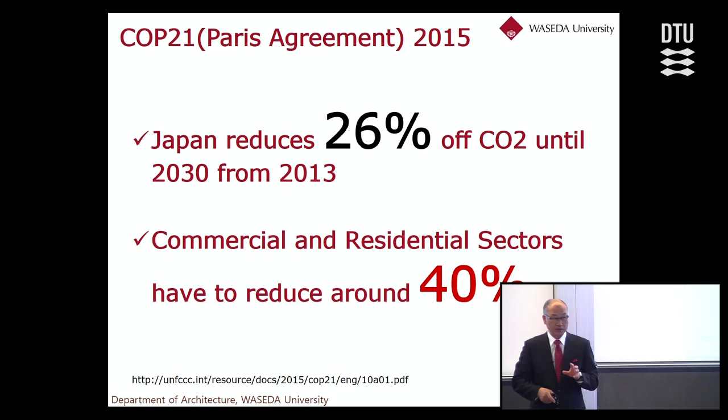Probably everybody knows the Paris Agreement, COP21. Maybe the US has a problem, I don't know. But we promised a 26% CO2 reduction in Japan, which is actually very hard. This time the government asked that the commercial and residential sector should reduce 40%. Industry is very efficient now, so it's very difficult to reduce further there, so they promised only 7%.

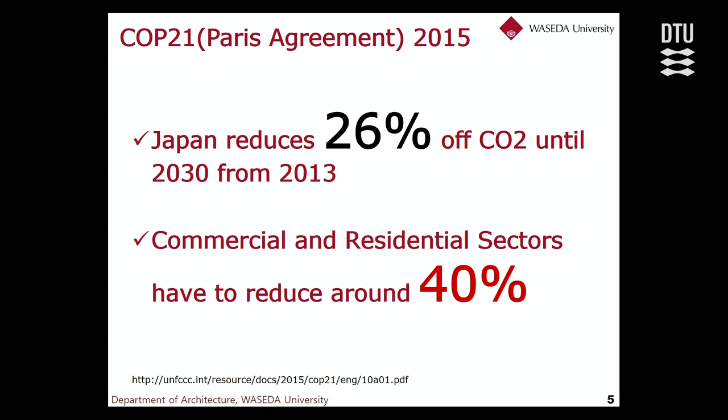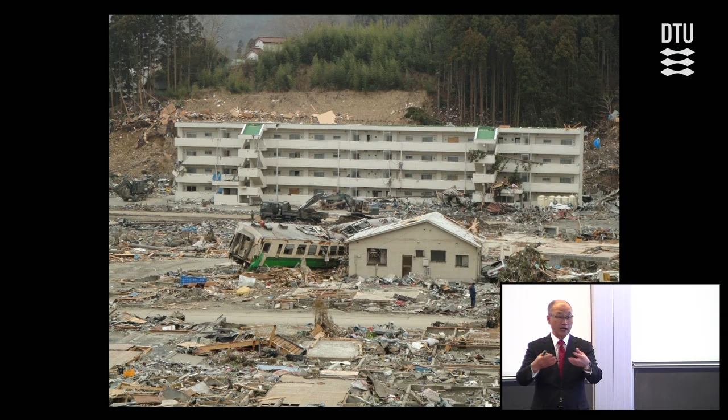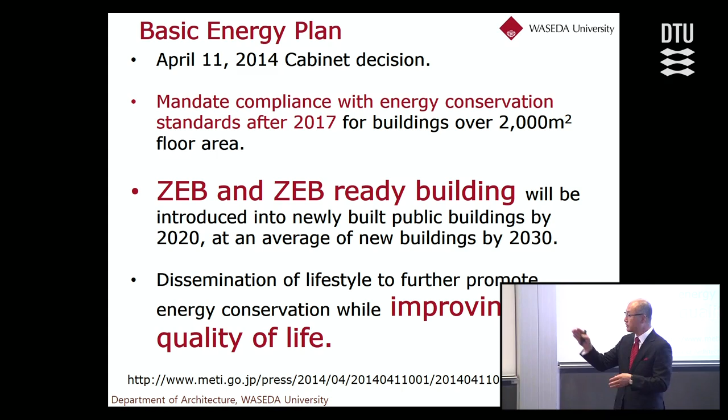But also, sometimes in Japan, if we focus only on energy conservation, people feel cold, dark, hot, and wet. That's why we input the sentence about improving quality of life, because energy, indoor climate, and indoor air are all very important on both sides.

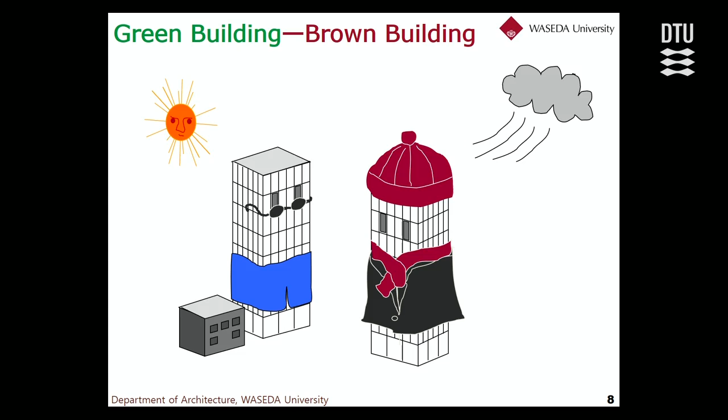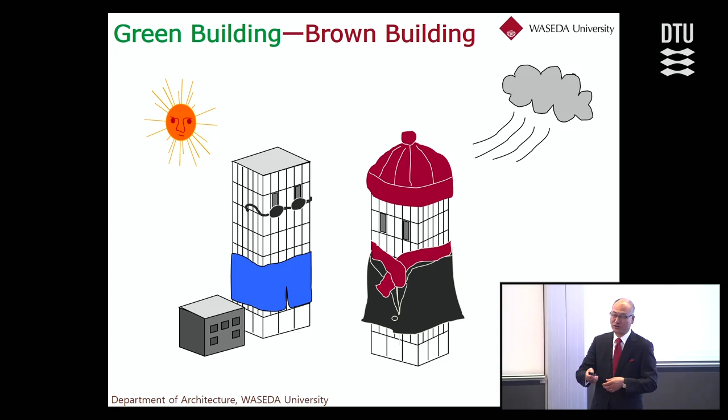And then there's the green building - we need a green building instead of a brown building. This is my student's drawing of this picture. I like green buildings, not brown buildings.

Probably, how many people know ESG? Raise a hand. Nobody knows? ESG means Environmental, Social, and corporate Governance. The United Nations defined ESG recently. This is a principle for responsible investment - it's equal to ESG investment.

For example, for assets - if you invest in a brown building, for example with government funding, it's not allowed for brown buildings. Also for other assets, for example, some fossil fuels may be used less in the future than before. It means you have to put the money into the green ones.

Now around 1,600 companies have signed up, and the total assets are over 20 trillion US dollars. So big money is going to the green. You can find the report for the PRI, published as a PDF.

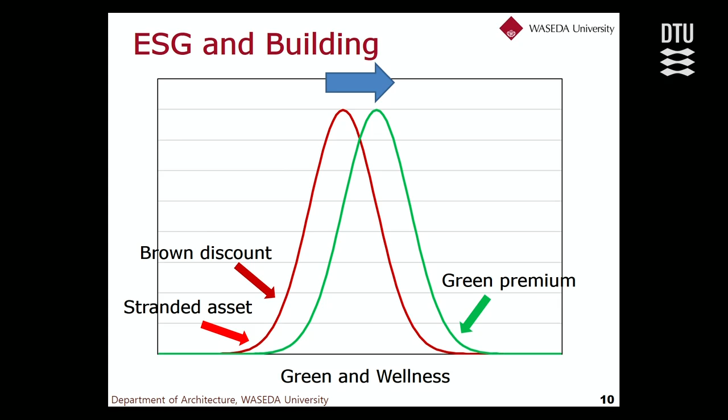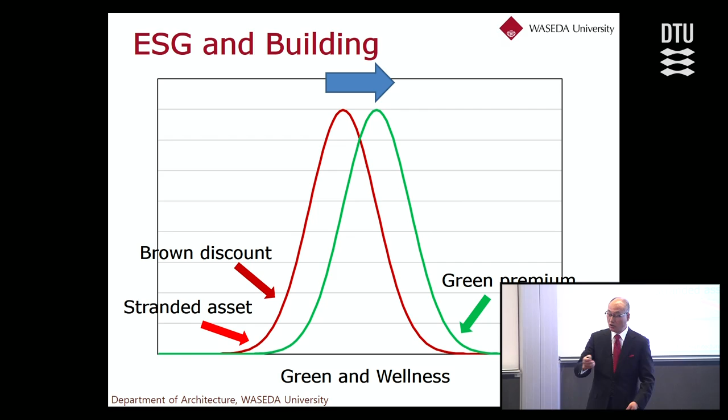This is one picture - this is a building now, for example, that is green and wellness-focused, highly green and energy efficient, and also has maybe good indoor climate. We call this end the brown discount building, because it's a cheap building. But later on, if the building goes to green standards, this becomes the stranded asset - the brown one has almost no meaning. So if you build a very poor building for indoor climate and greenness, you cannot make any money. So we should go to the green premium one instead of this one.

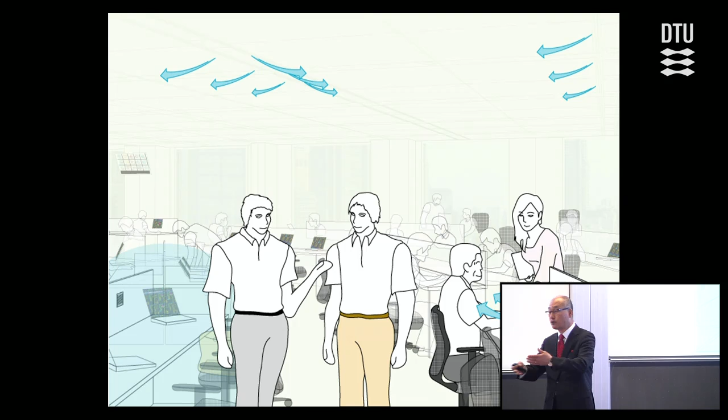It's important to use less energy for quality of life, comfort, and productivity, especially for the health aspect. This is a very important thing for research. And of course, behavior is also very important.

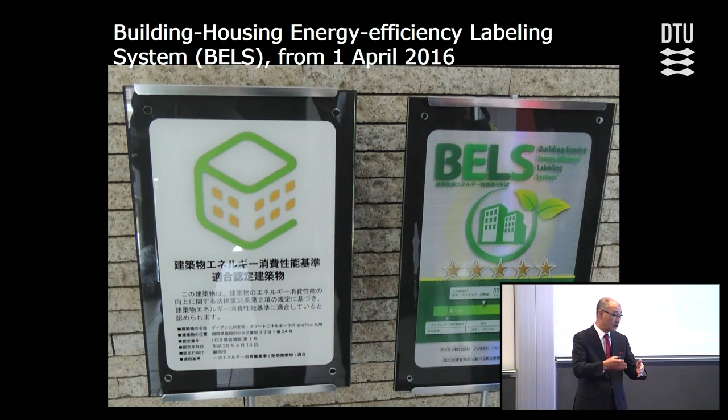Because of energy reasons, we started a new labeling scheme for buildings and housing, the energy efficiency labeling system, BELS, by the government from last year. I'm chairing the government session for this labeling scheme. It's been almost a year since we started this new system.

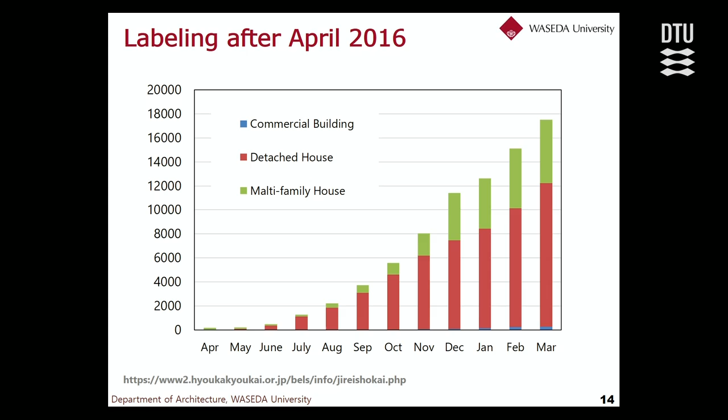In 1 year, it's a boom. Close to 80,000 houses and buildings have labeling already, because for ESG investment in real estate, people want to put money into energy efficient buildings and housing.

Also for zero energy buildings, sometimes for a 5th or 6th story building, it's very difficult to cover completely zero energy. That's why we need a new definition in Japan. So we discussed a lot.

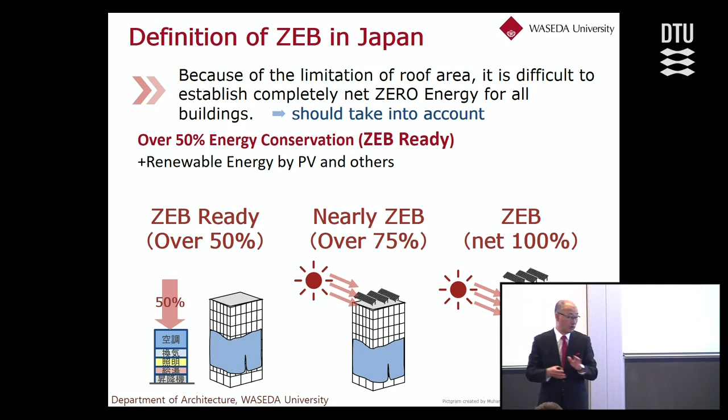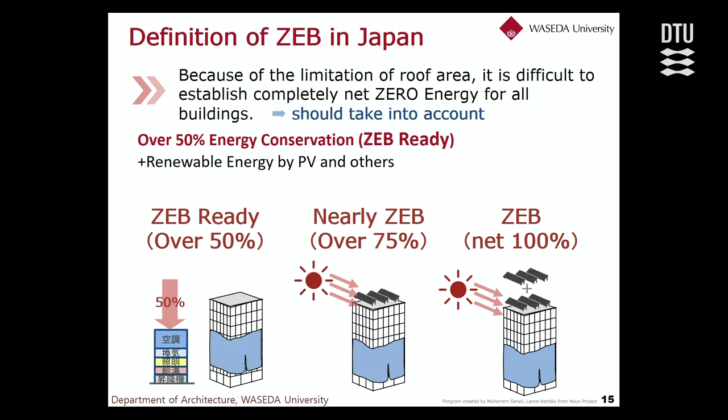This is for the design stage, not the operation phase. We use a program for the labeling scheme: 50% less building we call zero energy ready building, 75% with PV and renewable energy we call nearly zero energy building, and of course net 100% is ZEB.

So this is combined with the labeling scheme. It means for the 50% less building, the energy conservation building, we call it zero energy building ready. We call this the ZEB family definition, and this is widely accepted.

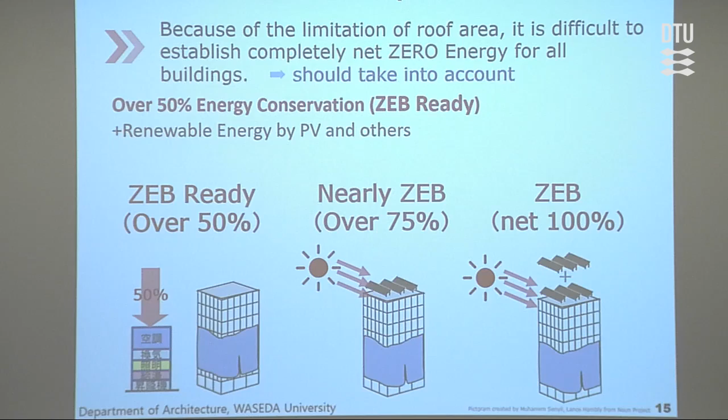We had a big discussion about plug-in appliances. Plug-in electricity consumption is not included in the 50%. So take note that this definition cannot prove zero energy in the operation phase. Also, only on-site renewable energy is counted.

Because for the building certificate, it's very difficult to know off-site energy. But at the moment, with the feed-in tariff system in Japan, we want to account for CO2 reduction in the feed-in tariff to reduce the payment burden on people.

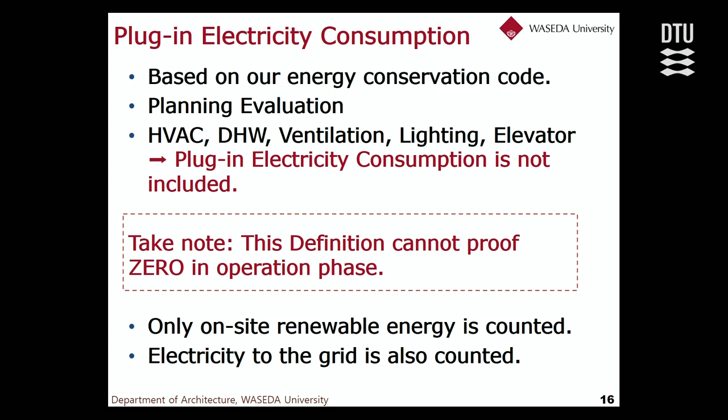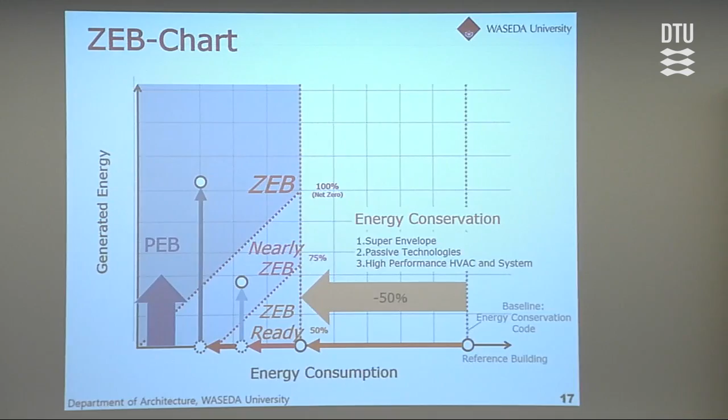We call it PEB also. This is one example: Takenaka Corporation, East Kanto branch refurbishment. They used this building for 15 years, changed to a radiant cooling and heating system and other new systems, and achieved nearly zero energy building status.

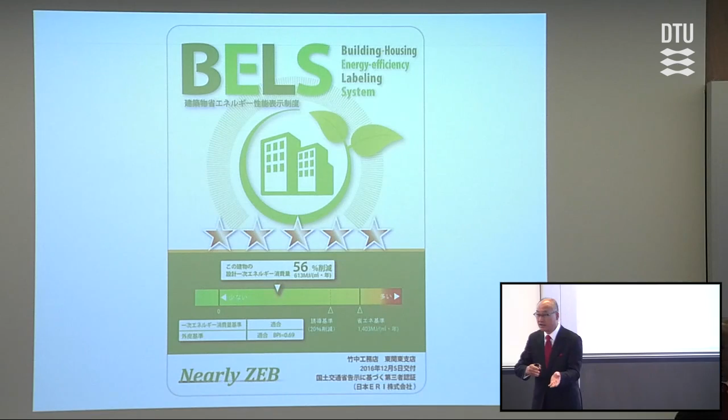They reduced 56% energy from the design stage, and then with the PV system added, it's less than 75% of the energy compared to before. So this is already certificated.

And also a new one coming from February this year. You know Lawson, the company like 7-Eleven, the convenience store? They made a zero energy store already, opened already in Tokyo.

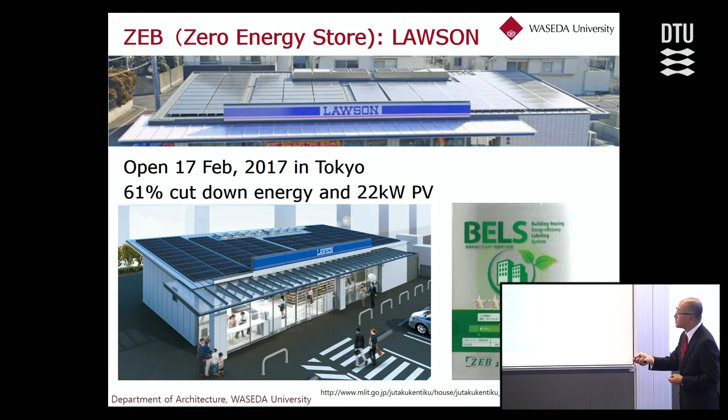They cut down 60% of the energy and also installed a 22 kilowatt PV system. So they certified a really zero energy building. It already exists. This is becoming something like a big boom in Japan for the zero energy family in buildings, and also housing.

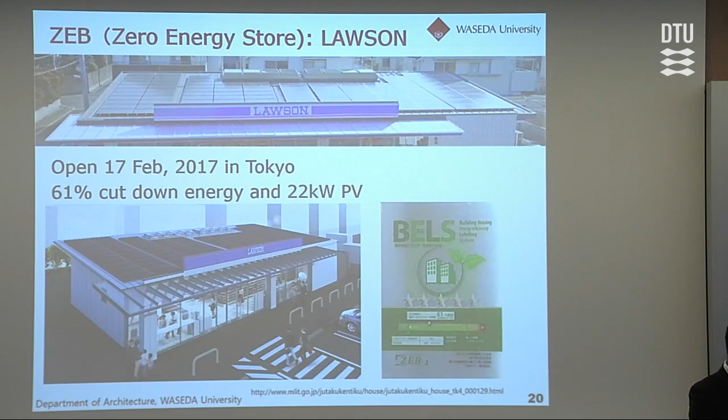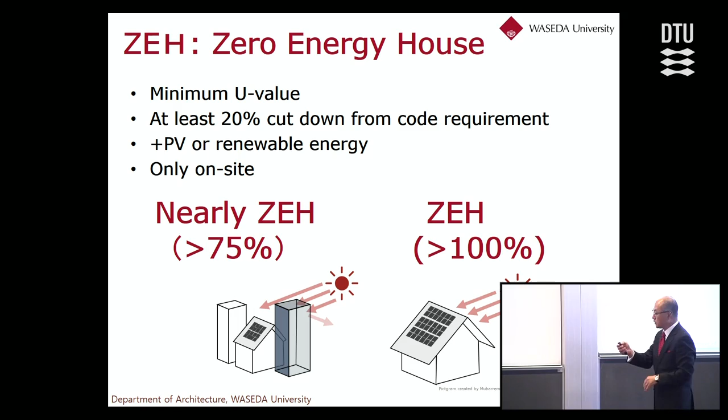We have so many small detached houses in Japan, in the countryside and even in the city, wooden houses typically 2 or 3 stories. We first defined a minimum U value and at least 20%.

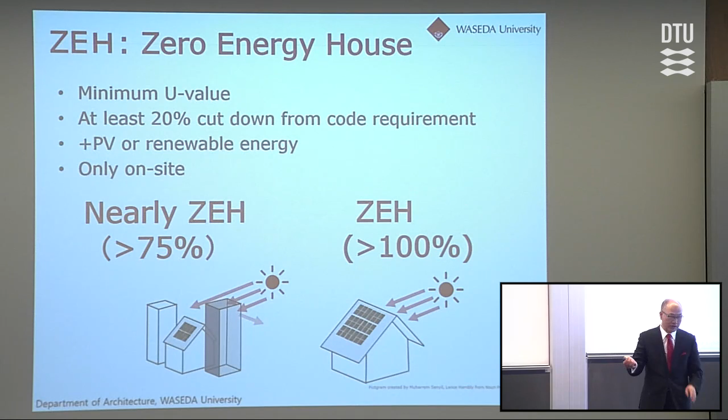It's not so severe: 20% with PV or renewable energy and on-site energy only, and this is a zero energy house, not a zero energy hotel. We call it ZEH in Japanese, for the 100% level.

And we provide a subsidy for the customers.

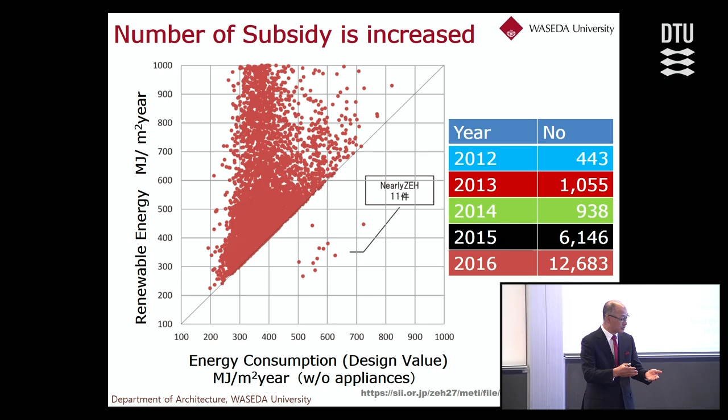In 2012, only 443 houses got the subsidy. But from when we defined the definition, 2015 saw a big boom coming. Over 6,000 detached houses, new houses, got the subsidy. And last fiscal year, over 12,000 houses had a subsidy. That means they're already built. So we predict maybe until 2020, 200,000 new detached houses, maybe for the zero energy house, but this doesn't include appliances.

For the first 1,000 houses, we already have data from 3 years of measurement. What we found is this is the energy consumption in a house, and this is renewable energy. Over this line is zero. Without plugging in, 64% of houses reach zero. But even with the appliances, 31% of the houses is zero energy.

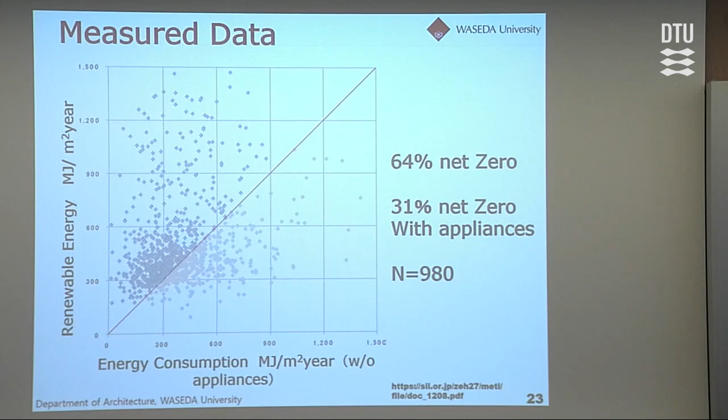So now, it's not just called the energy conservation house, but the zero energy house, high quality, and also for less energy.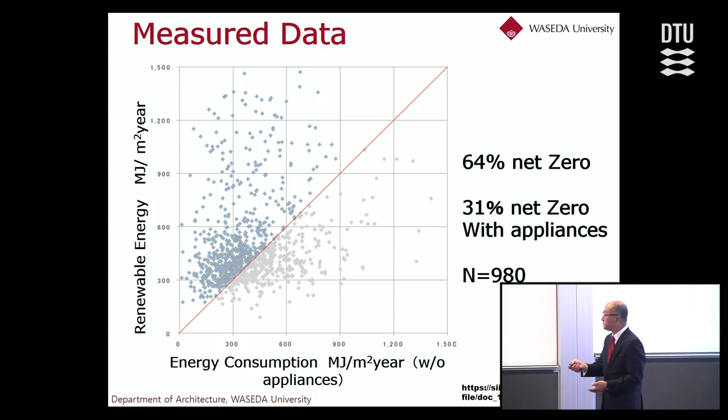And we put the mark also in the labeling scheme. We asked the government that you can put the zero energy house in your labeling scheme. So 50% off for the standard value, then you put in the PV on the roof.

And of course, this research is not only for the real market. We built like a solar decathlon in Japan. This is our first zero energy solar decathlon house in Japan, 2014. Unfortunately, University of Tokyo won that time.

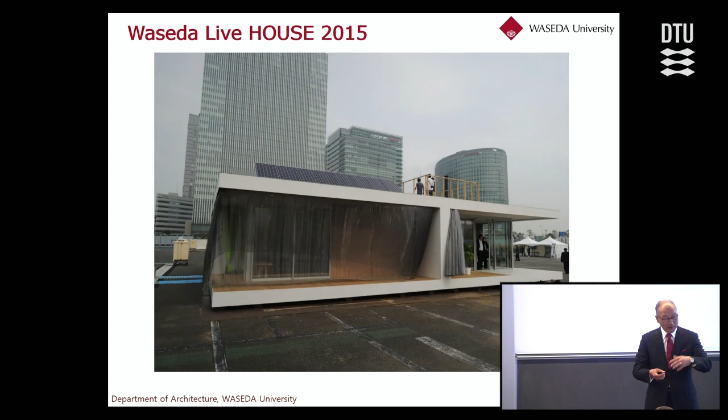And in 2015, we built again. So we won. This is our live house. And also this year, we have another contest in Osaka. So now the students are working very, very hard for that.

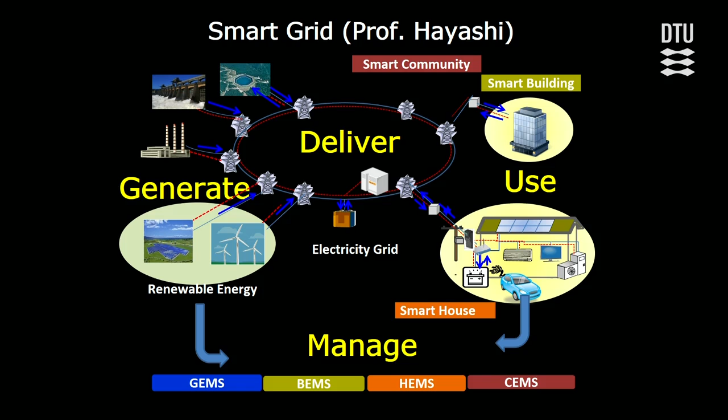And of course, it's not just for energy conservation, but also, for example, when we start to use the PV, it means you have to store something in the daytime. Of course, the battery is very expensive, but hybrid car and EV are getting cheaper and cheaper. And also, we have a CO2 heat pump tank. Now in the daytime, we may try to move the heat pump for the hot water, domestic hot water, stored in the daytime.

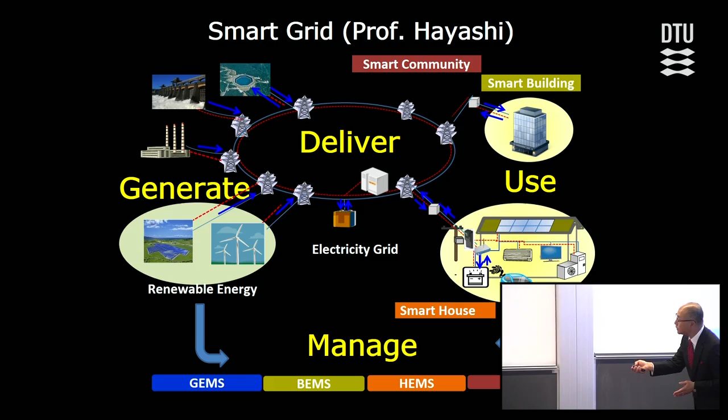And also the weather forecast is one very big issue for research. For next day weather forecast, sunshine, solar radiation, and raining. And also for grid technology, we have collaboration with 5 university professors from different fields: mechanical, electricity, building, and economics.

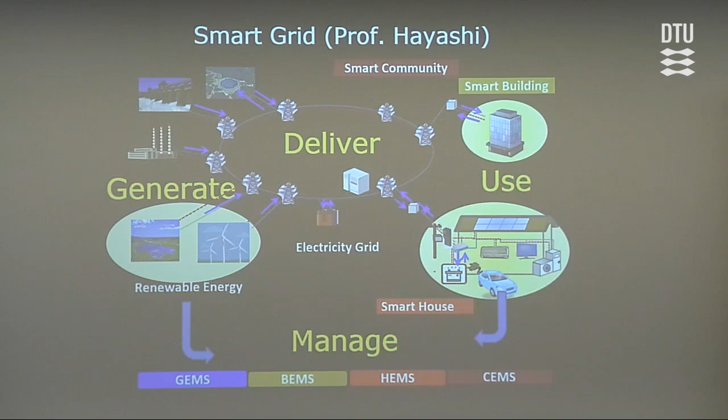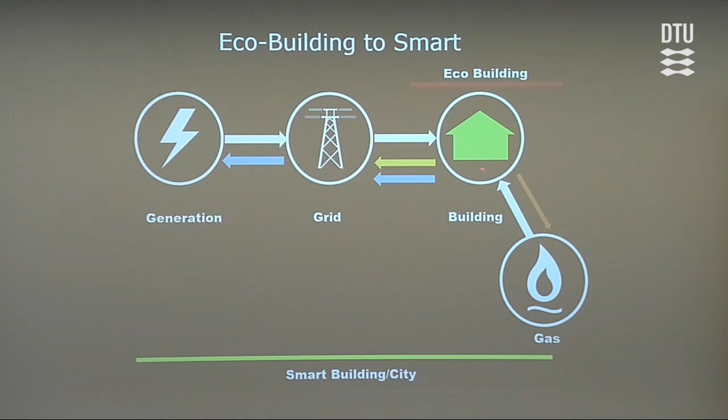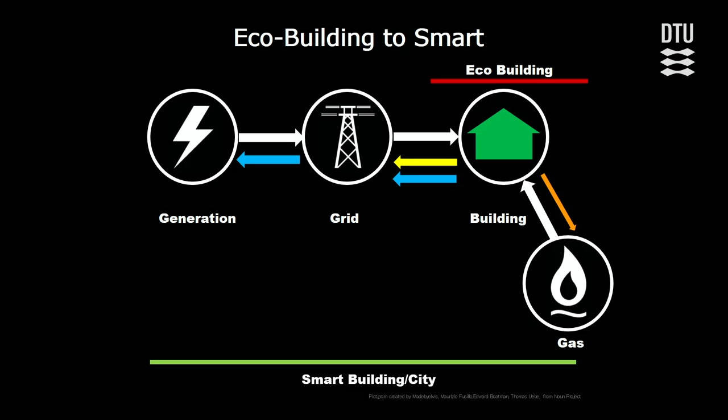And this is one very simple one. It used to be that eco building meant less electricity from the grid and less from the gas pipeline. But now it's very smart. So sometimes electricity goes to the grid, and also for some, we have fuel cell, so hot water goes to the gas company. And now we also control the information technology as everybody combined into the smart one.

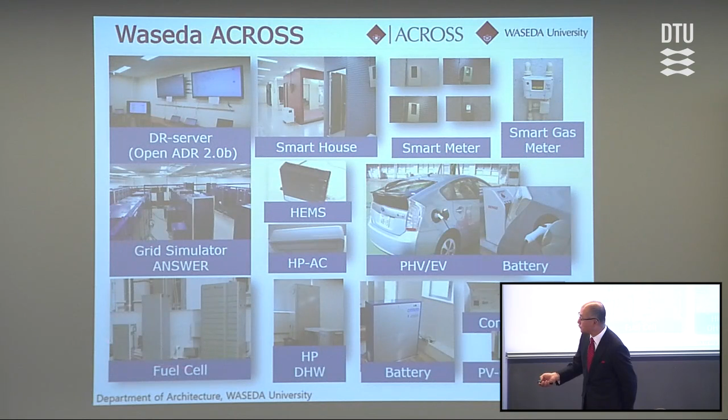Very rapidly, this is our research facility. We have a combined open ADR system for the grid simulator, and also fuel cell, heat pump, and EV and battery as a control panel, PV controllers, and smart meter. Actually, our electrical department professor is heading this, and 5 university professors are working at Waseda with these kinds of things.

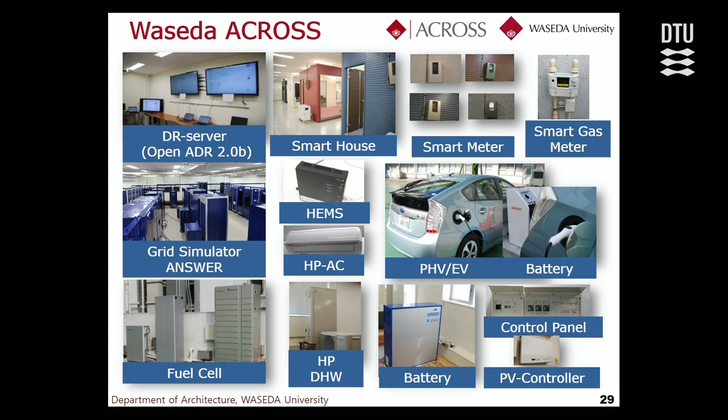Of course, please consider the comfort. This is also a very important thing.

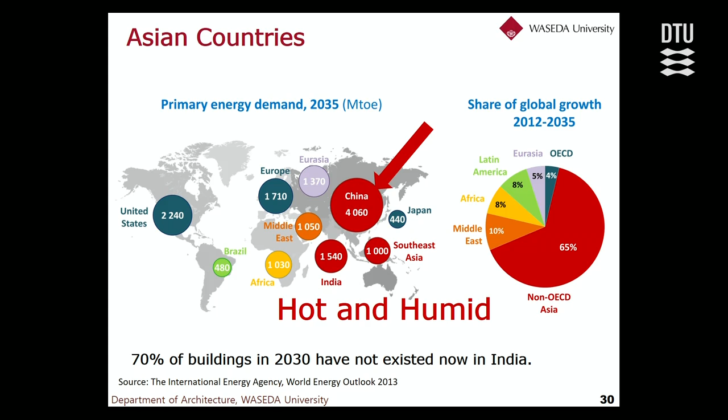And also, almost the last slide, Asian countries. So here is primary energy demand, how much energy they expect to use. Japan is not going to change much, maybe it'll keep stable. But China will use 9 times more primary energy for the next 20 years. And then also India, Southeast Asia and the Middle East. This is the key. And also this is the share of the global growth.

So 65% of economic income is coming from non-OECD Asia. That's why people are going to Asia for this region.

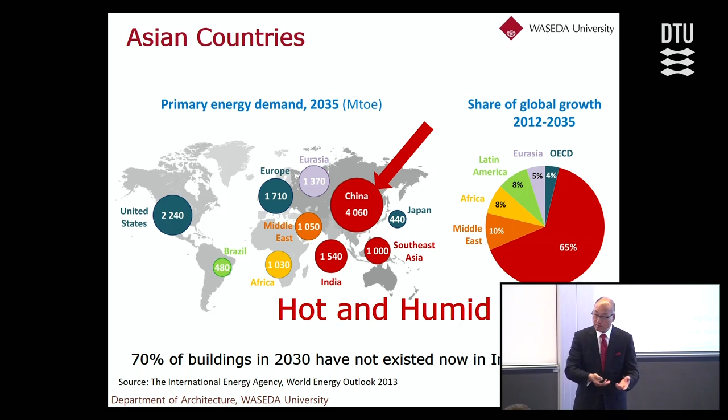This is my conclusion. DTU is the center of indoor environment and energy research, of course, since 1984 - already a center. And also ESG investment is very important. Building green and living healthy and smart is also important too. Zero energy building is the final ultimate goal. Energy management system, EMS, is key for the future. And non-OECD Asian countries have more impact on economy and energy. Thank you very much, that's it.